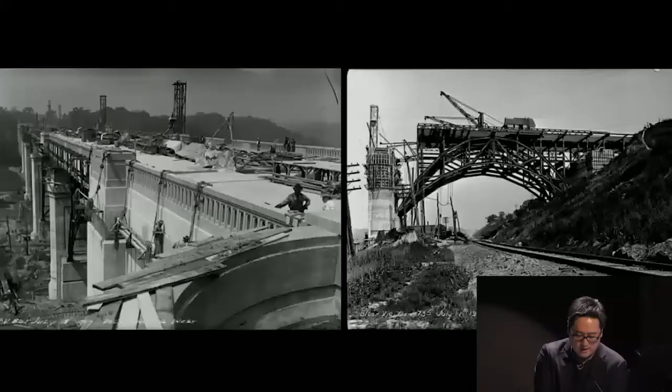So the words we already heard not long ago in the previous presentation, about something that's actually special that the city gives back - that someone, not maybe just Roland Harris, but others too hopefully, had the foresight to think ahead. This has always been an important image for me.

The Prince Edward Viaduct - I'm sure a lot of you know this. It's not quite a bridge, it's a viaduct across the valley. I love this image. Some of you know the story - somewhere around the Great War, World War I, this guy says, 'Listen folks, I'm the public works kind of guy, trust me on this one. We're going to build this thing across this huge ravine, and just wait - I want to build an undercarriage for the subway. I know we don't really have it yet, but trust me, and who knows when, but we're going to go east.' So this guy had the clairvoyance, a kind of urban narrative ahead of him, to say we've got to do this.

If you extract different things from today, is this part of the story we're just reliving? We're trying to be part of that same narrative. This is nothing new - these guys were probably thinking about the same thing at that time. How do we think ahead? How do we get our sense of invested dollars and efforts and interests into something that'll pay it forward, that'll go on to next generations?

Thank goodness for this. Thank goodness for someone - I don't even know where the city would be. If Andre was here, he'd probably be up here grabbing the microphone right now to say, what would we do without that subway system's ability to cut across?

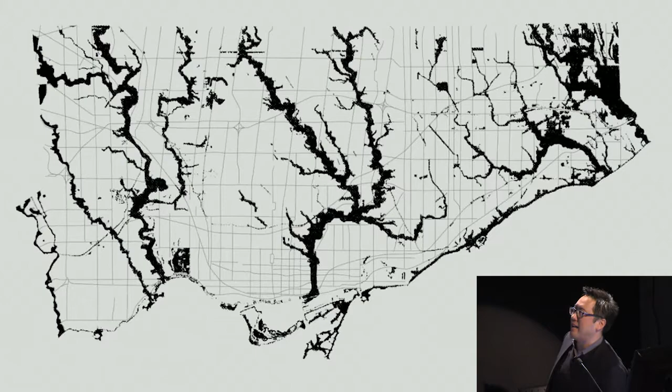That's along the ravine systems, and it's funny to show this singular layer of data. We all know our gridded network systems, those 10 square grids from the military days of what started Toronto, and how these systems arbitrarily overlaid our city. Of course you've got ravines, but looking back at Kim's or Andre's or several Laurie's, Michael's layers that we are also contending with - this is just one of them. It's funny, we have to really ask ourselves, is our city responding well enough to those edges? We saw some of that just moments ago. Do we actually have enough wherewithal, or at least time, to say why don't we react a little more to original layers or new ones too?

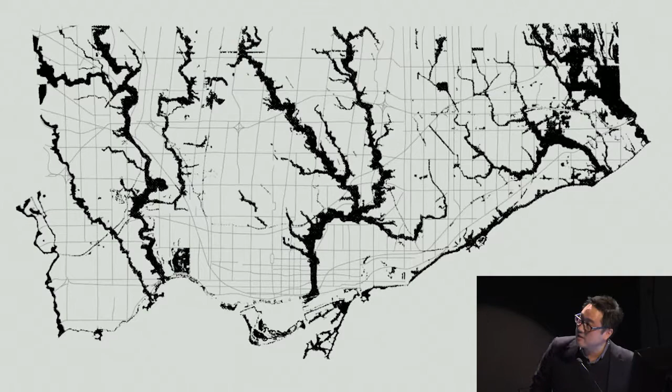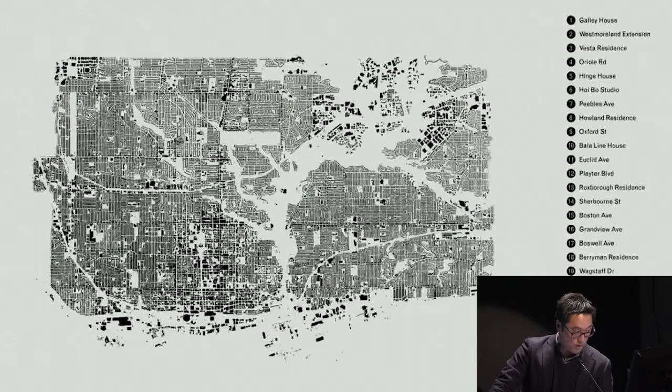It's just a bit of an image of some of the things that we were doing, whether built or not, in the central part of Toronto. You can see the areas where there's not built form.

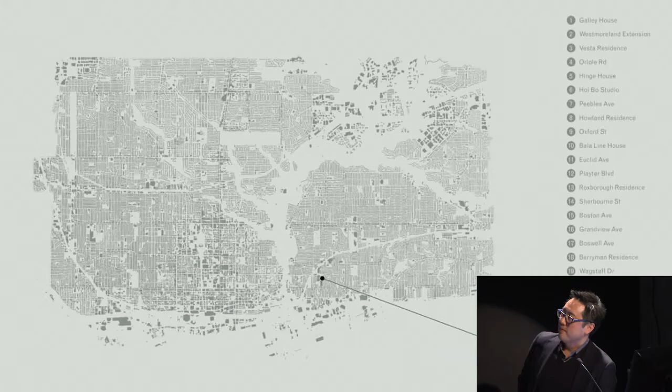Our spot is actually very close to where Kim just showed one of her studies on Carlaw. It's funny, that's the Wrigley building, 100 years old this year.

This circles back to a conversation just at lunch: someone decides to build a gum chewing factory that, who knew, or did they know, would be resilient the way they built it. Robert Hill from KPMB sent me a nice note congratulating on moving there, because that was widely published across North America in Pencil Points back then, as one of the first reinforced concrete structures of that type and scale, almost hitting 4.5 meters per floor.

Who knew that there would be that kind of interest in that kind of space, that it could last even as people move forward and get out of the way.

I have a bit of a theory too, which is it's this sort of weird cycle of gentrification, from photographers to cupcakes. It's the photographers who are renegade enough to say they need space, they're a little different, they don't care, they don't really need a neighborhood, but they'll go to cheap space and get there first. That's frankly what happened in this space. Then all the cooler, slightly less cooler, maybe graphic designers, architects, start to follow.

The cafes start to show up, the cheese shop shows up, then the dog shop, and then it's kind of done—when Starbucks, you'd think, but no, the cupcakes. So your realistic arc stops right around there. Something to think about in terms of gentrification cycles.

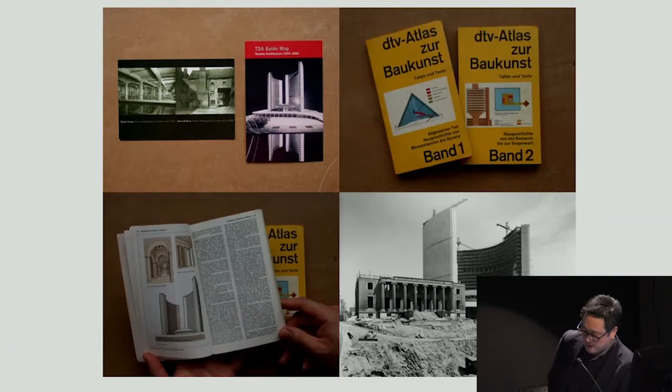This is us in that space. You can see we're looking at about 13 feet clear, and these kinds of questions cycle through even some of the projects we're looking at too. We got the little library behind us there, which is a good way to show some of the context in which I was taught.

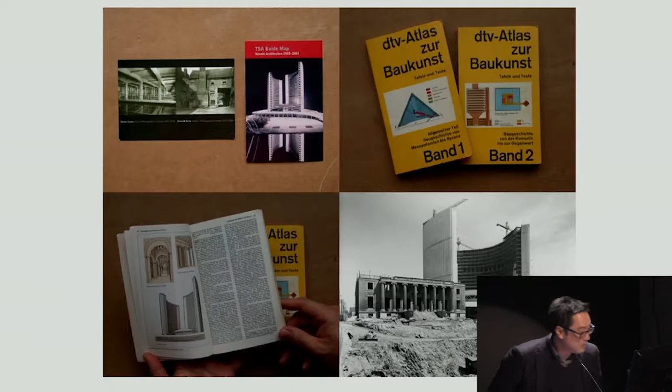These are books given to me while I was teaching by a German man, Hans Lucke—some of you may know him. He handed me that book that all Germans seem to have when they study architecture. I was so moved by the fact that, next to I don't know, Greek architecture, our city hall was there, and what it meant to Toronto at the time. So these are the ostensible poles of our design world that not just me, but many generations here today, probably all of us, were influenced by.

On the right-hand side was my own drawing. I got asked to reissue the drawing of the reflected ceiling plan at the banking pavilion. Detlef Mertins asked me to draw it back then by hand. I redrew it for, I guess, a Phaidon book that's coming up.

But just the graphics, the belief in the city, the understanding that there's actually something in our water that made our city win the competition for Nathan Phillips Square and City Hall, and also got Phyllis Lambert to do her thing over here at King and Bay. You've got to wonder whether that actually makes a difference for us.

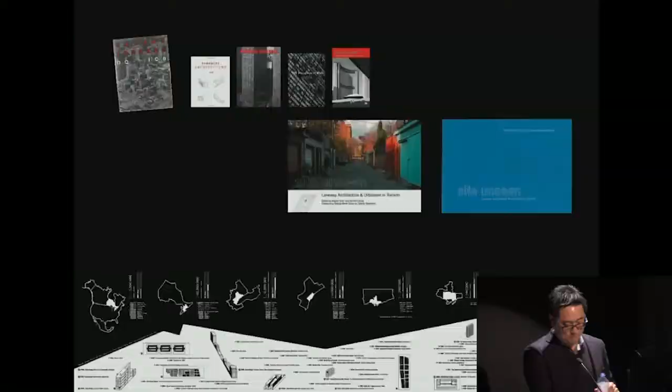I look at this a lot because of the background it gives me in terms of cities, and I think this is really good. There's a reference to my wife who's on this TO Core project, which is interesting because a lot of people—from the people who write Spacing magazine to Matt Galloway on radio talking about cities as much as he can—to the kind of culture we have in Toronto, I think we're very lucky.

You could see, for me, many of us I'm sure, in the upper left corner, Vacant Lottery. Barton Myers and George Baird dedicated that to Jane Jacobs in 1978, the same year as Delirious New York, and I think Colin Rowe's book with Fred Koetter. That was actually done out of the University of Minnesota Walker Art Center, which positioned Toronto morphologically as a real and relevant study point for North American architecture.

We don't always have to look to Europe. We love Europe, but there's just something different. We started a different way.

Steven Holl cites, in the Pamphlet Architecture series, Urban and Rural House Types, he talks about Toronto and the double house types. I love that he had the foresight to not talk about his own designs, just study. He would look at Philadelphia houses, dog trot houses, and the Toronto double house, which we might affectionately call the Bay and Gable house, and cites George Baird.

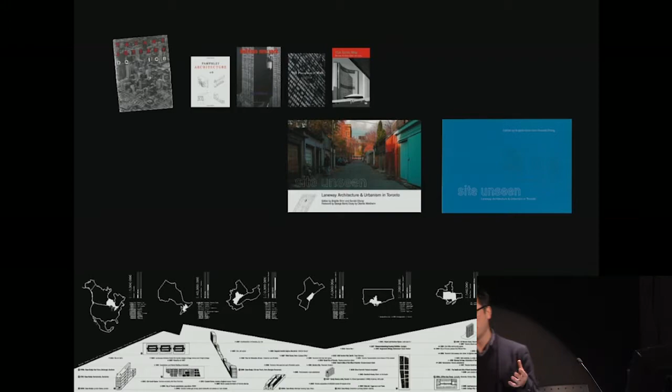It started to make me think about what's going on here, and then I had a chance to work with Rem Koolhaas and Nigel Smith on the reissued Delirious New York, again more interested in ideas of published knowledge. Detlef Mertins asked me to help out with it. Things like On Building Downtown, Built Form Analysis - these are important documents that make my life easier, and I believe many others' too, because there's something that situates what we're trying to do.

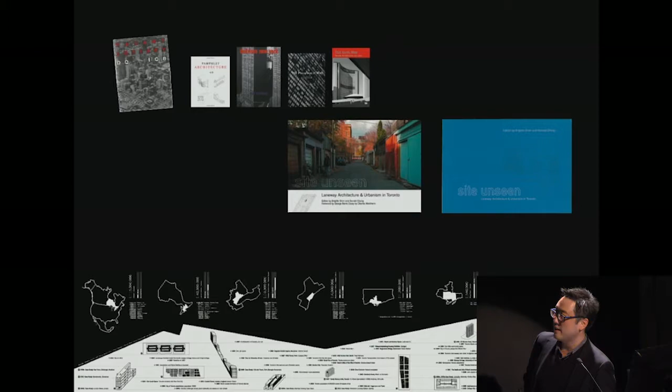So those were the covers for the book and the studies, and the kind of timeline of everything that surrounded the history of the city, both by precedent afar and within the city too. And the last time Leafs won the cup as well, if you look closely.

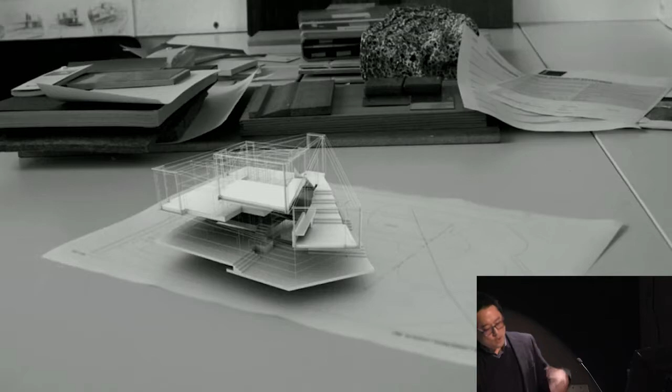So whether we look at the macro scale right down to details of things - studies that, particularly with Shane Williamson and Betsy in my office, we were not afraid to try to see where things might take us in terms of digital tools that could overlay, quite literally, with the physical things we're doing. I keep pushing them, they keep pushing me - let's be as progressive as we can, but let's try to work unplugged as well. I think it's a good dynamic.

Just some studies also of what I call the Lola Table. Anyone who knows the 70s, that ice tetrahedron thing, that would be the joinery piece for this series of legs for a cafe I was looking at furniture for. This is just other levels of detail for layered on-angle aviation plywood that when you CNC cut it a certain way, you get this 'peephole' look, a bit of a Tapio Wirkkala kind of look, if anyone follows their Finnish mid-century designers.

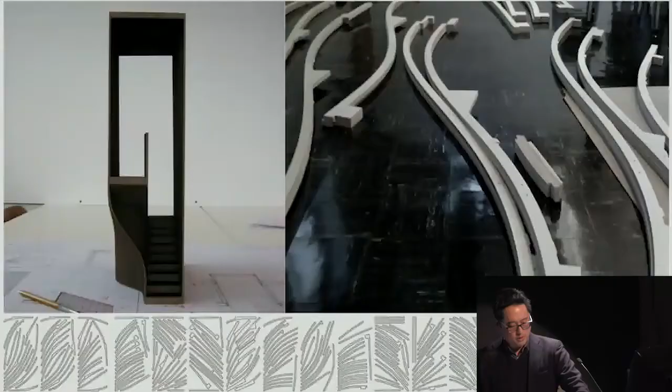This is the kind of thing I know Shane and Betsy really worked a lot on, just prior to when we merged, in terms of fabrication parts that could be good components for certain parts of the buildings - nested fabricated pieces, and how that would work in the space.

Mock-ups we try to do a lot of, in this kind of weathering barn board type of surfacing, for a project up north near Collingwood.

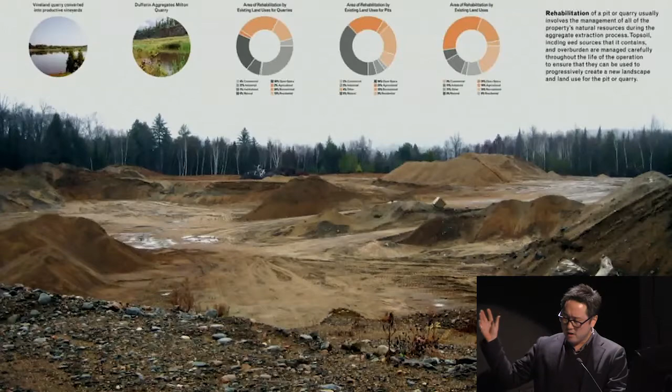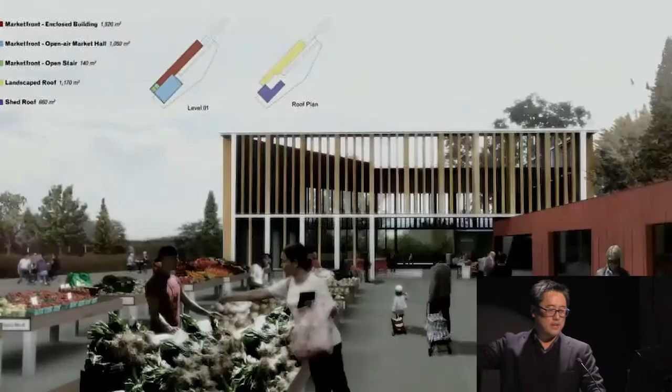I know this isn't urban, but it touches on a position for a project we've been looking at long term, for a food community up near Haliburton. It has a series of modular greenhouses that would be strung along - there's a whole number of things in cross-section that would work there to make it function. But one of the things that was part of that village was, of course, some kind of hub, a marketplace.

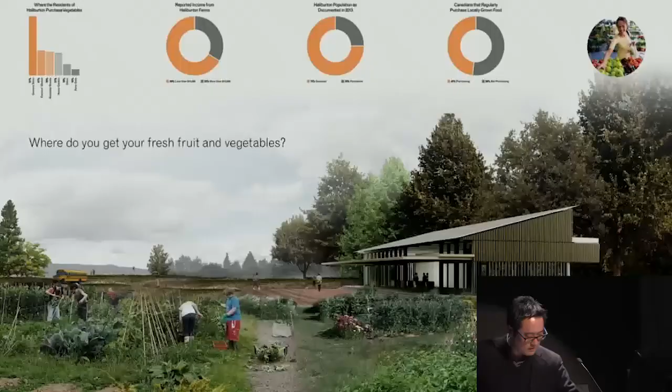Where I really bring up this project is for this little guy here, where the word catalyst came up in a similar way. Part of the role of the architect these days, I wonder, is that we're not so far down the line anymore - we may get the call a lot sooner, when people don't really know what they're after. That's fine by me, because I think they sometimes need that facility or ability to air out their thoughts. This is one of the things they didn't know they were wondering whether they should do - something of a Kickstarter project, one that could let them have a hub, a place for summer harvest dinners, where they could invite people for the first round of donors.

It's a kind of thing that as architects we could help invent, if not Jedi talk, as I was telling someone earlier, how to tell people that they actually can do something meaningful if they just kind of listen to some of the ideas that we might generate as well. It's okay, I want to believe, that we could be somewhat prescriptive in a respectful manner in order to get the best value for these kinds of projects.

And this here was related to things for that food hub up north. This here was just one of the many pavilions that we would do as part of our studies in the larger project of just doing things like for the interior design show.

It was weird because it was all indoors, but we called it natural light, because it was actually for a window company who we thought it'd be kind of fun to play it up in the middle of February back then, and it was nice to be able to kind of test out ideas.

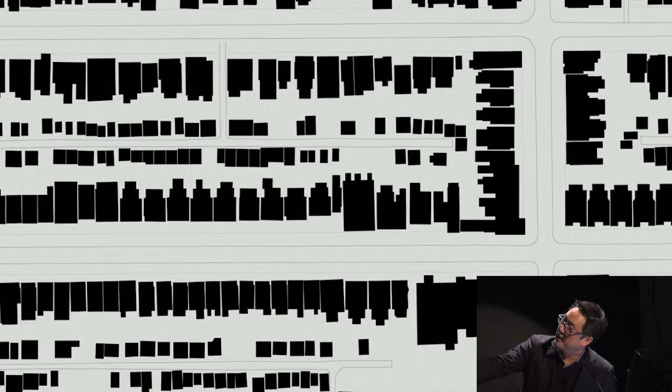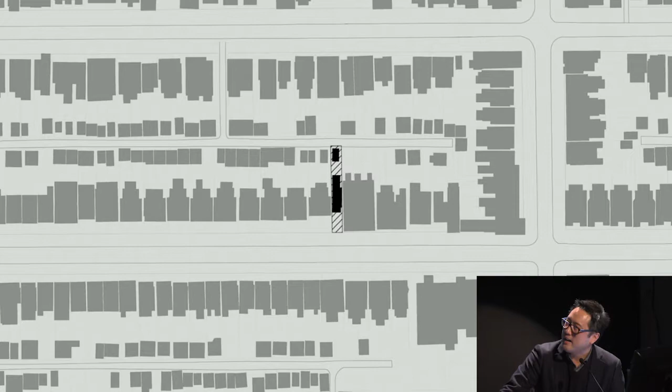This project is near Roncesvalles, near Sorauren. It's a bookend to a site across from a large church, about 13 feet 7 inches wide by 126 feet long. It really tests your ability to do things in terms of narrowness.

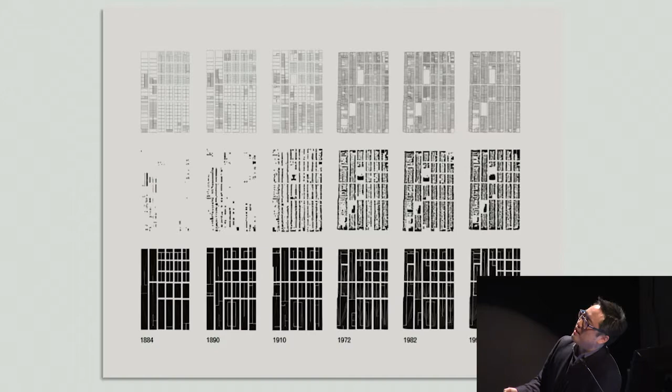I pulled this image from our studies, kind of a nod to the way George Baird and Barton Myers did their own studies. It's interesting to think that our urban blocks, the real medium of the city, are so resilient that I think we just kind of got it right. Other cities missed proportionately. But the fact that we could get these great blocks, there's a whole alphabet of T blocks, H blocks, all these different things that let us subdivide.

A good analogy is the Aesop's fable: is this thing full when you pour in the rocks? No, not quite. Is it full when you pour in the pebbles? No, not quite. It's the sand, it's the water, so you could still get a lot out of our blocks, which is really great.

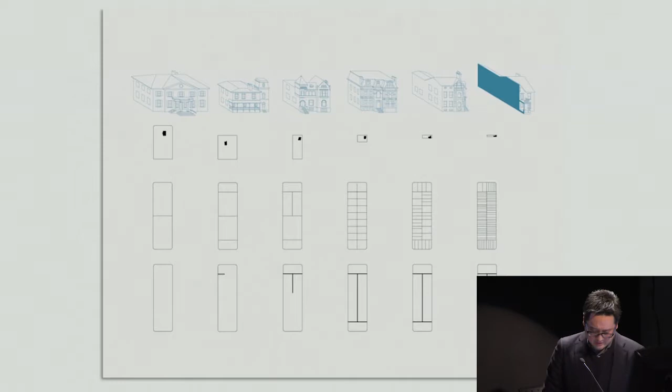On top of that we have the infrastructural tax base that would grow, infrastructure's still there, it needs a lot of work still, but isn't this a good way to make good use of our land? I always like this little drawing I wanted to put out there, that same sort of double house, if you will.

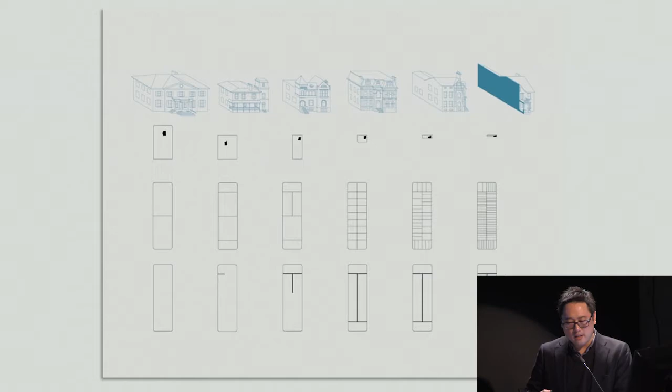Was that the last prototype for a little while? There's been many since, but what happens when your lot divides, and what spits out, and what's its relative density in these places? Could there be, or should there be, for every architect, some hope that there's an idea of a prototype, if only so you're trying to look ahead, the Wayne Gretzky line, where's the puck going to go?

This is the piece of land that, if you build it properly with the city, would leave you with about 13 feet outside dimensions. Actually, inside dimensions were about 11 foot 10 altogether. And then, of course, with all our conditions of the side, limiting setbacks, limiting distances, you can't have any light on the sides.

So this is all about trying to drive in light, including having the skylight back there, which would even out the light on both sides. From an optical point of view, it won't be so harsh. You could look right in.

I learned that from a restaurant owner in Stratford. He said he spent as much time trying to balance the level of light in the day as the sun went down, as much as he did with the menu, because if it was a mirror effect, it would really rub people wrong. I think it does to us when that happens in the city. I tried my best to keep that in there. I think it worked.

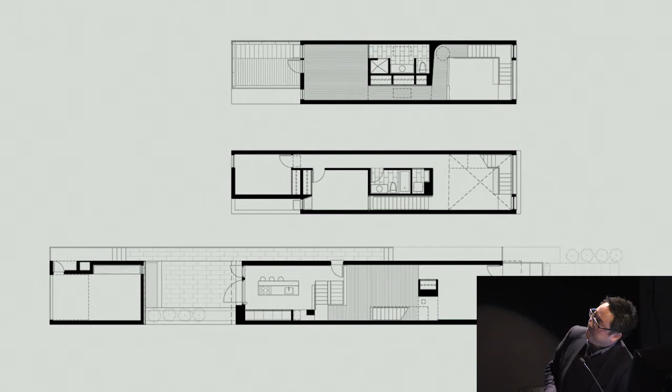For the most part, if there's anything to take out of this, it's that I want to try to make the stairs in certain areas turn fairly quickly. I wanted to put the stair towards the front because I didn't think it'd be right, I thought it'd be a bit of a crime to put a bedroom at the front.

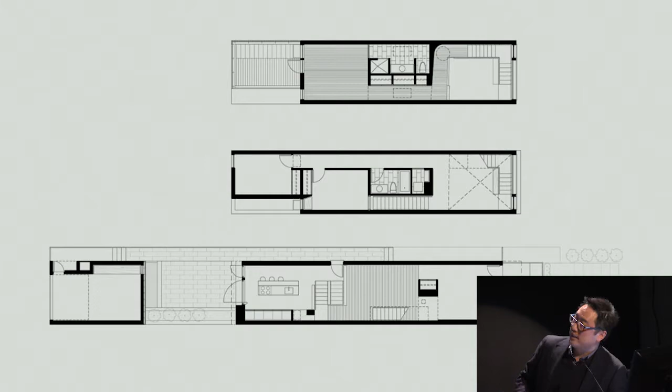Meanwhile, I want to drive in light. We all know in Toronto there's always that little nook in the corner that lets light into the middle dining room, the middle bedroom. Here I didn't have the luxury, so it was about stealing natural light. The detail mattered. I knew right away it was going to have some kind of open space at the front.

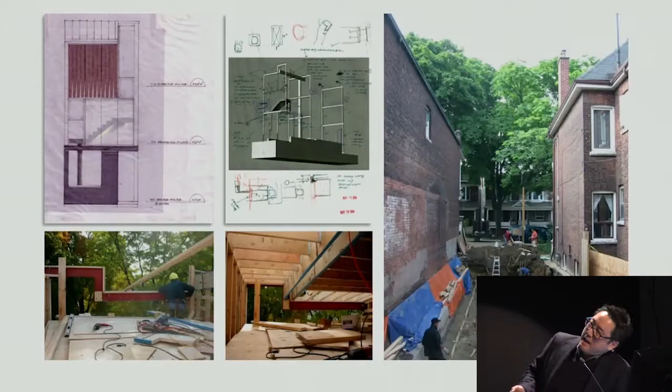These are just some quick snaps of the moment frames. If anything, even if I preferred a gingerbread sort of syntax, I would need to have open spaces. I think modernism is a tool, it's not just a de facto style. And lateral forces, lateral systems are huge for us. That alone changes cities if we have the ability to make those work.

There's a system of different ways of getting the heat up there. My first real hole I dug under my name alone, and it really kind of turned your stomach in a good way.

And so yeah, we have this stair that comes along the front. It actually helps with lateral stiffness as well. And there's a detail in here you'll see coming up, which I just loosely called my urban detail.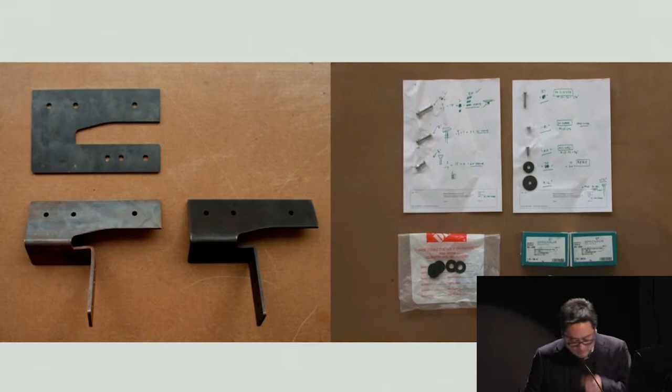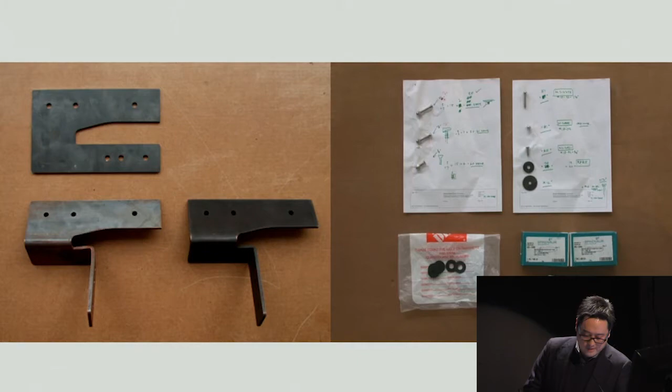There's a skylight there. But this little guy, 1/8-inch bent metal plate, has enough stiffness once you just turn it in the X, Y, and Z. And then just sifting through the right number of gaskets to get the right ability to get these pieces in and work it all out. If I could save a quarter or 1.25 inches here or there, that means I could turn that stair, make that layout, and then go for that piece of property.

And we just borrowed a lot of light from the sides, as much as we could.

This is now becoming - I get calls from all around the world asking how we could somehow employ this elsewhere, because if people know Le Corbusier's Pessac project, that might have helped me think about this again, where you could line them up side by side because they would effectively work since they don't have any walls with openings.

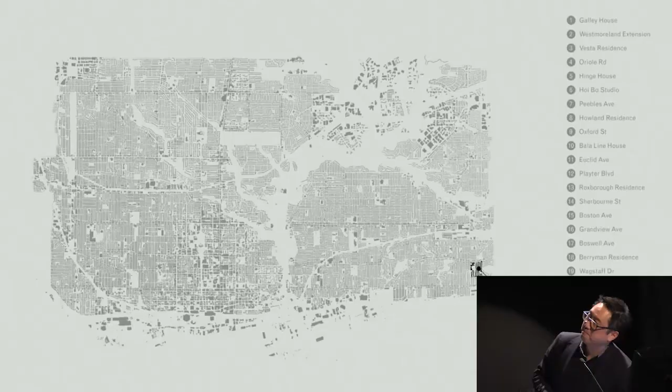This project, just on the edge of Scarborough, not far from the filtration plant, is a wide lot. We severed it. So this is about the infill homes that really, when we detail them to work within these spaces that are otherwise seen as orphaned or not interesting or scare people away, that's when we strike. That's how I told the owners to go for this. We worked with the city to help get this severed.

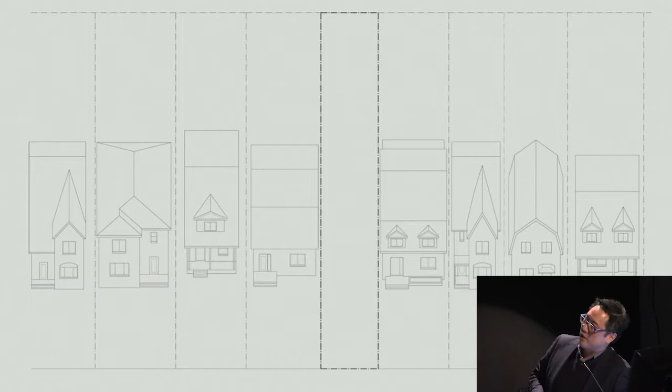There was actually a tree in the back that the neighbors - though it was our right to build outward and lose a tree, we decided to keep it, which meant that this building, a little wider than the galley house, was less deep.

It meant we had to have one room - well, two uses, but one room, our kitchen studio. There's a piano nobile, really, over here. You'll see in a second what we're doing there, because we're getting the double cantilever and a tension rod on diagonal there, which is right over here, also to let the light in that corner.

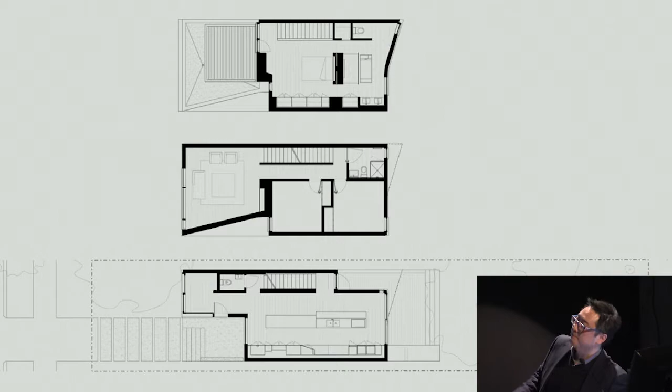Without that, this project doesn't work. So just trying to drive that in. And on a budget, of course, we're trying to work with our dollars, saving it for the lower level. This area here again, the details in the millwork really counted, trying to get the right kind of aisles. And this overhang was the living room.

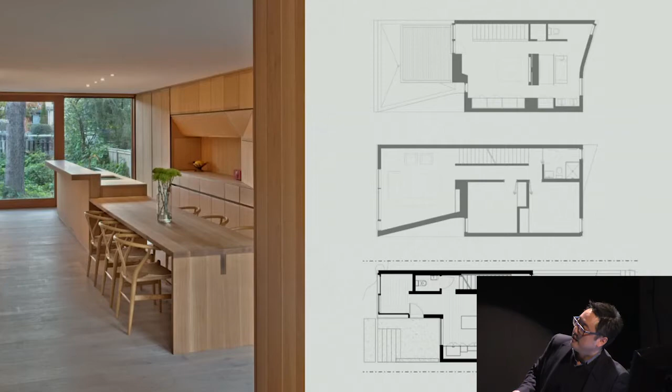So this is the kitchen studio combination. The details here worked out real hard just to make sure we could save the overhangs of 1 inch or so. Knife edged all these things. It actually weeps well, so it dries nicely. Gave us the extra 2 or 3 inches across the whole room.

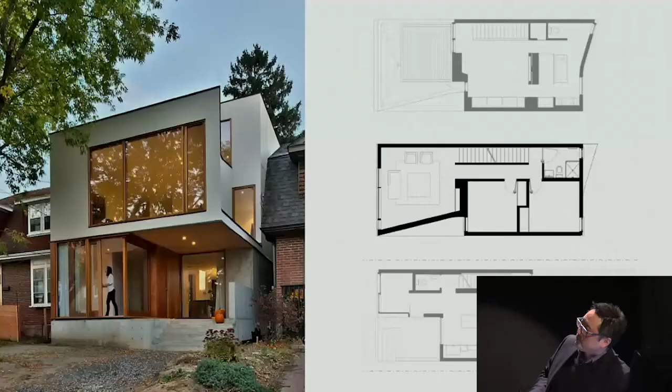Means we could do this. They were decidedly all about being clean, but I like that we could show something like a small fridges make good cities project, and this too. And then that's the knife edge right there, you could see. So that's how this project worked.

Without doing that, I wouldn't even know where to begin trying to get light into that spot, because we couldn't have any perpendicular facing unprotected openings. And these are the things that actually inspire us, not shackle us - we don't hang our head. We try to run with it.

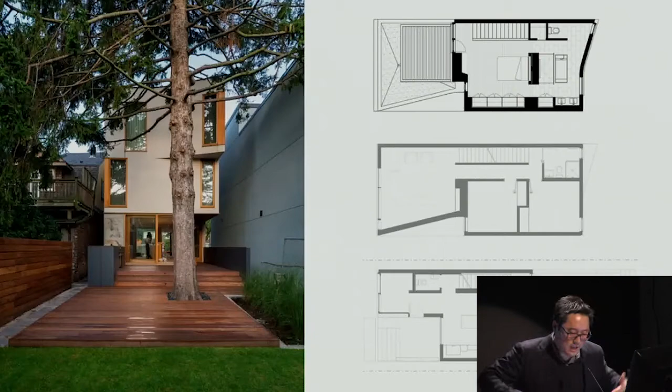And the backside here, which actually had to step back and lurch out because of the distances around the tree - we had to make sure the angles were posed so they didn't disturb that canopy drip line.

This project is actually along the ravine system. And just showing this to you also to show you the different kinds of projects that we're given, that we try our best to keep a control on those limitations, so-called, in the city, but try to make it work for us.

And so this whole side here, we only gave it up to certain areas, particularly the back side, which you'll see in a second, which opens up to basically one of the Bala line spurs, which if you walk on it now, since it's decommissioned, will take you - like a lot of people - right to the Evergreen, which is a nice little path for all the families that use it.

So it's a little fuzzy here, but yeah, so a triple sort of system that closes out and opens up that way. What I just loved here was the amount of ventilation that comes through here. It just runs through, and it really takes advantage of the hillside.

And you'll see some kind of running details, things that modify and change project to project, largely starting from that Small Fridges Make Good Cities project. Still adapted differently for these other ones as well.

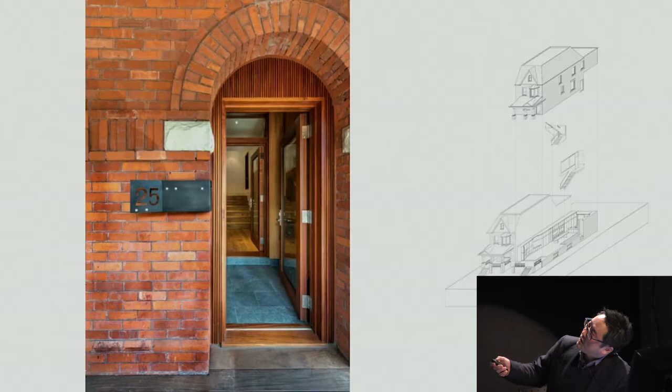And then I tried to detail that in a way that lets the condition on the side where you enter be adaptable for the idea that the house is a dynamic thing. It's not static - we know that. It's like the cities we're talking about. I think Alberti said you should be able to design a city like a house and a house like a city. So the old thing that was chopped up with servants' quarters, the whole deal.

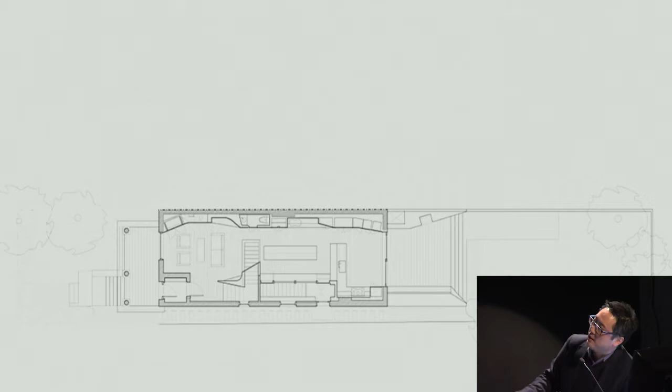What we did is we ran millwork, which might look like we kind of had a field day on it, but that's the difference of us having 450 square feet in the basement, because through here we could get all the storage we needed. And then we kept this L stair just so it would work, because we didn't want to reconfigure the upstairs too much. And then we get this, which lets us flow through.

You see on the side, that's the light that's about 4 feet away from the actual window. It lets the people go beneath them, and they still get light coming in.

To your left, about a bay or two, is this equivalent detail, which just might look like a panel door, but if you look over here, I designed it so that this little pencil box detail for the kids in a weekend, that could pop out, and there's a door. So that door then comes back.

And this is where we're proud of trying to say, does that kind of thinking let us get the house in the first place, right? And then suddenly their own little dollars and cents sort of big picture makes sense to even get them to do that, because they're happy to walk to work and go where they got to do by transit.

And of course, just keeping other details throughout the house, as it were, on the back side.

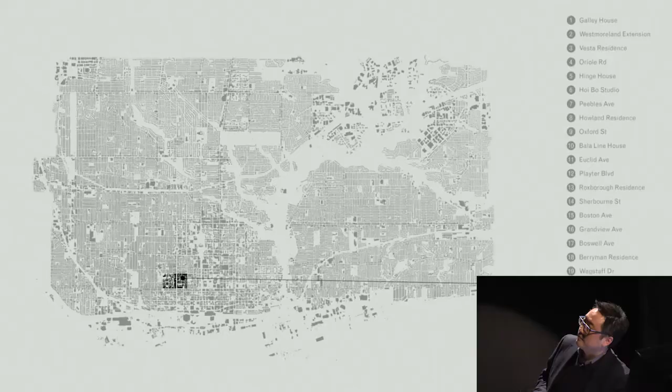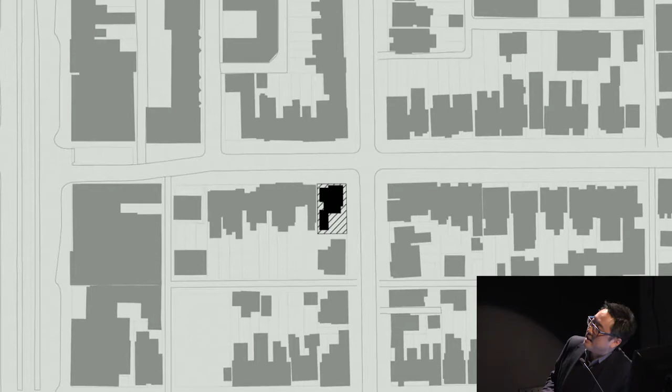So this thing, same kind of story. We had a family who owned a corner lot near Chinatown. Where is it actually? It'd be right here. And they had 2 corner pieces. So it was this thing.

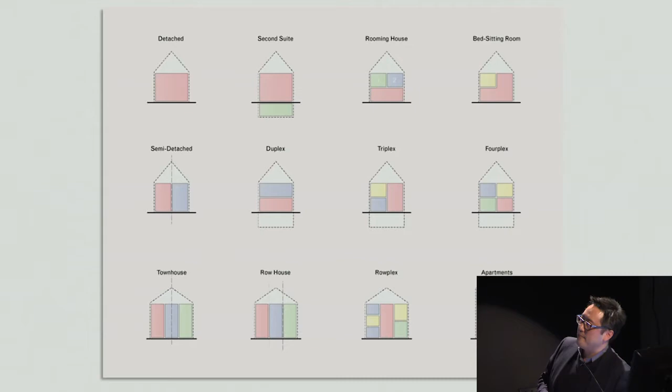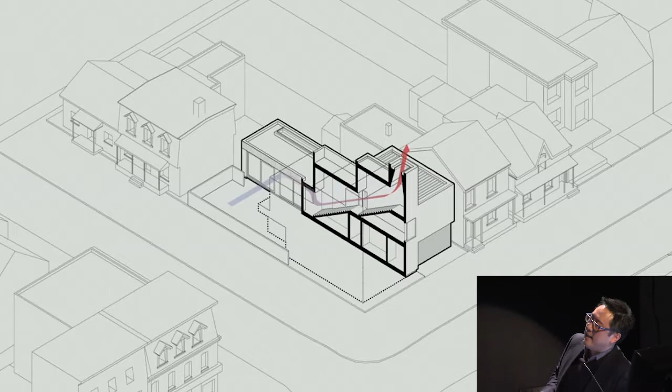So this corner was about having a courtyard, but because it had 2 entry points, we just wanted to have a project that had a common stair that would split up the family who wanted to live in there the first time with the parents. Unlike the other project, they wanted to be able to live on the uppermost floor. They were going to decide how to move and mix it around and let the family of 3 grow in their own sort of semi-private way in one house, actually.

And then the other part would be a rental. And they each had their own interest of having their own sort of private garden spaces.

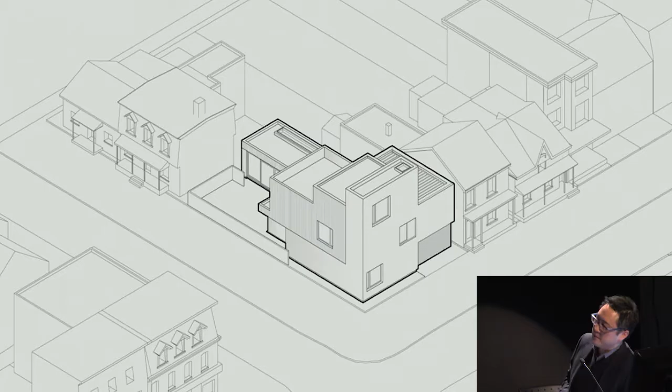So we just tried to offer a lot of light, but with levels of privacy and two points to enter. And it's interesting because on this corner, we really wanted to say this is a project that's all about trying to see the bigger picture. There it is with the brick that we had started it with.

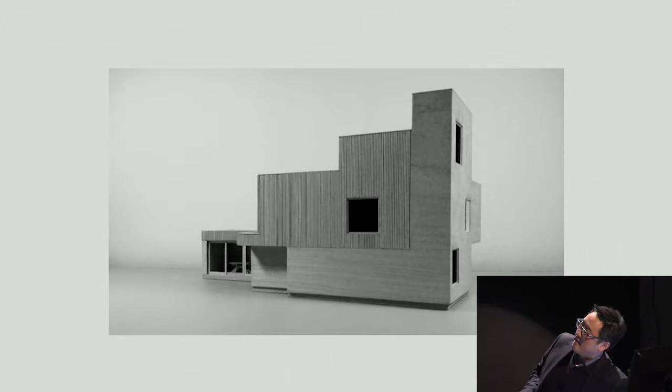Some of the studies there. And this thing here, this is interesting. Metropolis magazine asked me to send this in. I called it Towards a New Proforma, because the other elephant in the room is this is what everyone's thinking about.

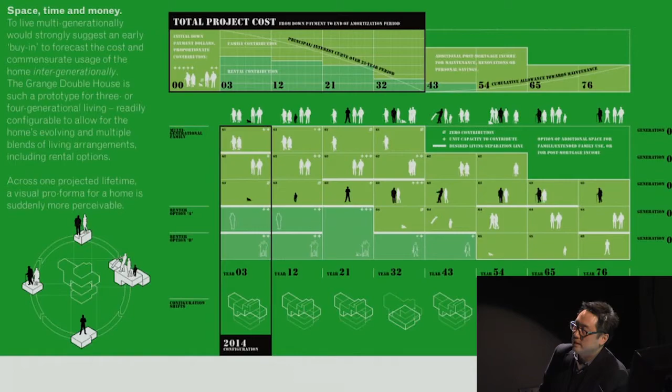There isn't a time that we have with these projects with multiple units, multiple family sort of components, multi-generational homes, where they're not thinking about, okay, what about them and their older folks who are going to put in some amount of dollars with them, and a little kid who then might grow up enough while these older folks might get widowed, and then while this guy gets older, comes back later with a girlfriend or maybe a wife, they have a kid or two, and you start to see that people kind of think this way.

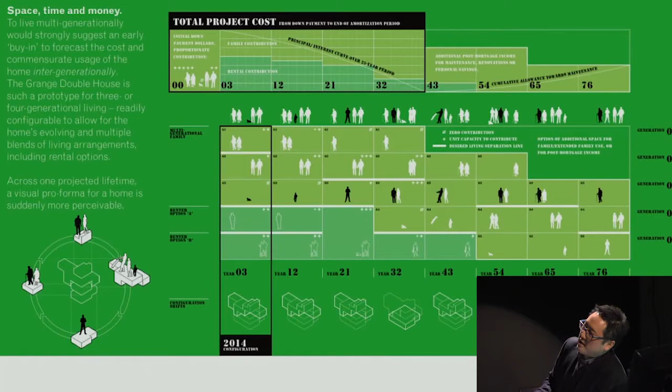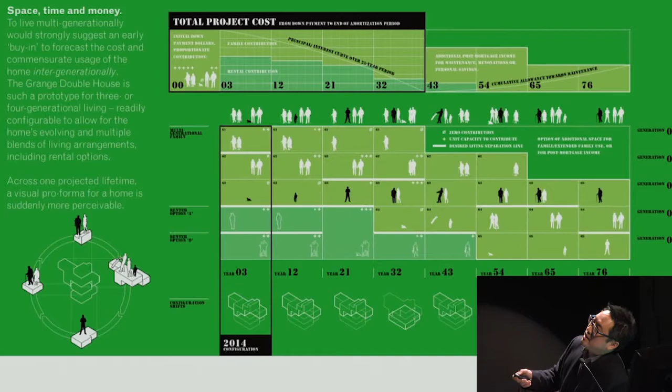They don't know for sure, but we're trying to say, can you have a configurability that lets this house actually work, so that it works with their usual 25-year sort of mortgage curves, and then whatever dollars they get from rent, they start to see it for future dollars for other kinds of things. And so can we actually start to see the design, even for a house, that gets the fact that it could work and move and actually start to evolve.

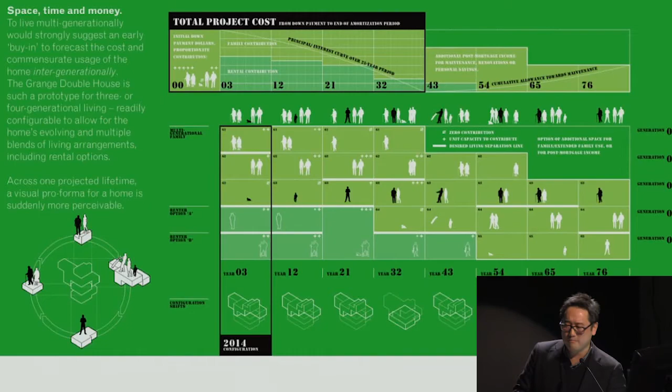And I think that's the thing that I've embraced, I hope, in the design we do. It's not just make it look cool, it's trying to do something, right down to details in how certain doors, certain partitions would work.

I'm just throwing in this project. It was a little while ago I did this, and it's interesting, kind of a hard act to follow with Kim's and James's beautiful work of their stuff. This is something that the Globe and Mail once asked something of me to do, and it's curious.

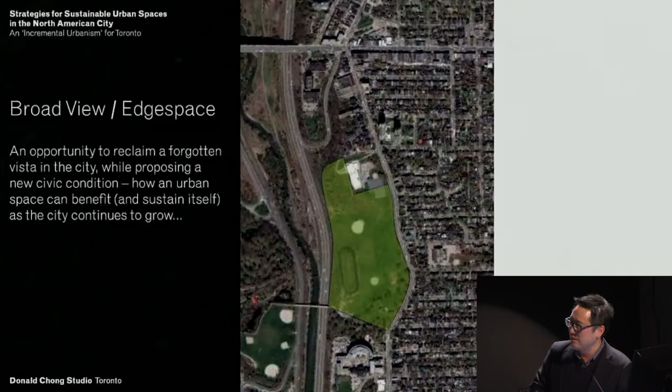They said, can you do a park on the cheap? Kind of a blunt series of words for a request. And I thought, what does that mean? But I said, okay, fine, here we go. I said, I know a place where it should be, and I always thought that this is one of the most underrated views of the city.

Busloads of people come here, but it's complete with little bins and gas outlets for all the old pollution, or I guess the garbage dump that it was back then, methane I guess it is, but beautiful views, and somewhat treacherous in a way to get down.

I thought, wouldn't it be good to have some series of viewing platforms for space, kind of on the edge. And I thought, wouldn't it be good if, however—I'm starting to see, but hold on a second, it's pretty hard as it is to create new spaces in the city. You know, there's that kind of double curve, the curve of depleted funds or materials.

But then are there areas in which there's actually an excess, a surplus, and could that actually be something like wood, perhaps, coming from public parks, let's just say, or public buildings, let's just say. So when a tree gets felled, could it actually be material for parks that are designated, maybe annually?

So this is just kind of a proposition, a prescriptive project. So what if maybe then you could say for, let's just say, public buildings, if you could identify that, then you could get a certain amount of wood when it's dressed and kind of there. You could get the same kind of community effort, the same kind of people who actually would do skating parks or want to do that kind of community involvement.

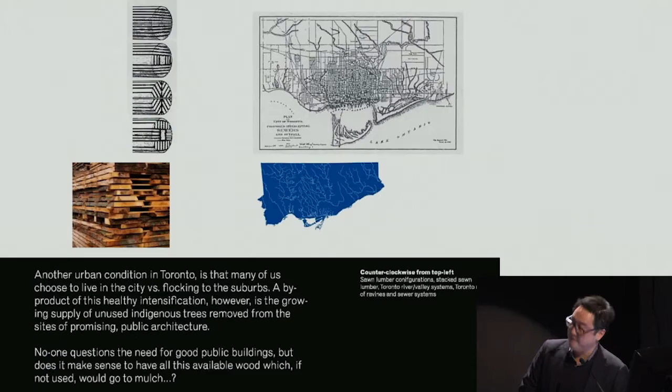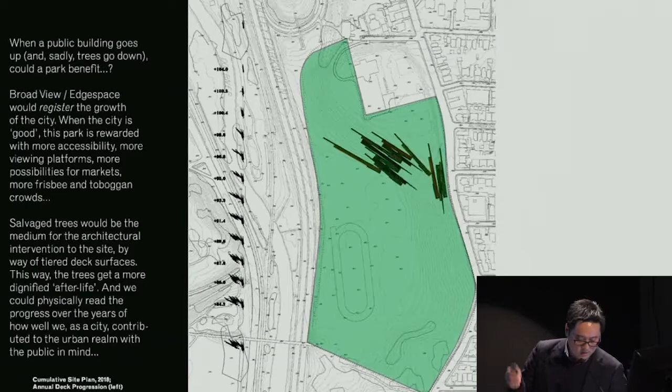Could it be the means of the materials for an annual deck? And could this deck, if it actually just kind of went along the topography just enough so that it wouldn't be a guard at 600 millimeters max, allow people to then switch back—but it'll only switch back for as much material as you could actually properly make it with.

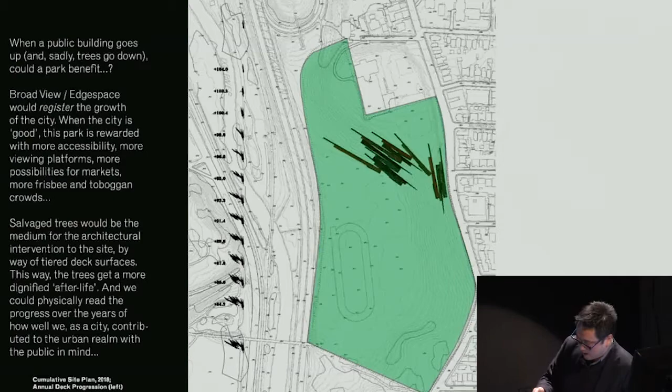So then, it's actually not being designed, it's maybe being scripted. It almost sounds like a parametric software conversation, but really it's actually being set so that whatever you're given then will be maybe that year.

And then you're only as good as that year because of the public buildings that came to you, that gave you the best cuts. You could even compare that with other people trying the same project in other parts of the country to say, hey, we had a pretty good year.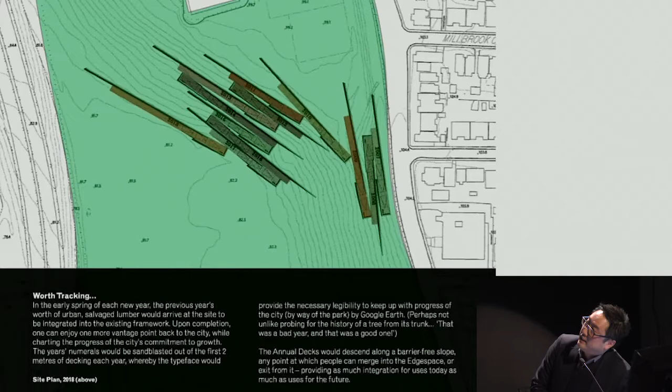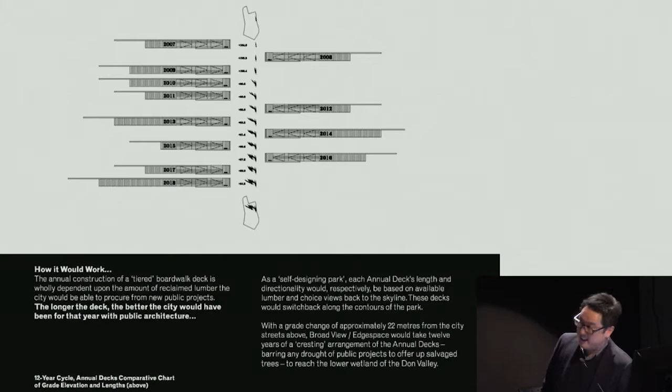What was great about this is, this is just me giving it a go, and I like the fact that it got people thinking. This comes back to: what are we as architects? Who are we? Are we just waiting for the phone call from the enlightened client with an enlightened frame of mind? Since when were we not the kinds of people that had good ideas too? Just something to think about.

I think that's important for us, because where does our authorship, our willingness to prescribe, fit into the bill? I don't think it should just be about that phone call. I think it's up to us. It's that kind of weird superhero thing. We have a little bit of, I don't want to call it power, but skill for sure. But therefore we have responsibility, you'd think.

This is Wagstaff Drive in Toronto near Greenwood and Gerrard. Got these guys from Pilot, actually Te Aro Cafe. They just said they needed a place to have a warehouse. They looked everywhere, we checked old movie theaters, we did everything. They loved this because it's so close to the house, they could get all their folks to bike there, walk there. Even their delivery guy cycles. And it's real, it's not just for show.

Rebecca Condon at City of Toronto called me up, loving this thing, because I was worried—when the City of Toronto calls, you're not sure what's up. But they loved it, and I think it was because they'd like to see that this kind of project was the perfect storm in which there were people actually starting to move on from their ownership. They got younger people who were saying, let's try something different.